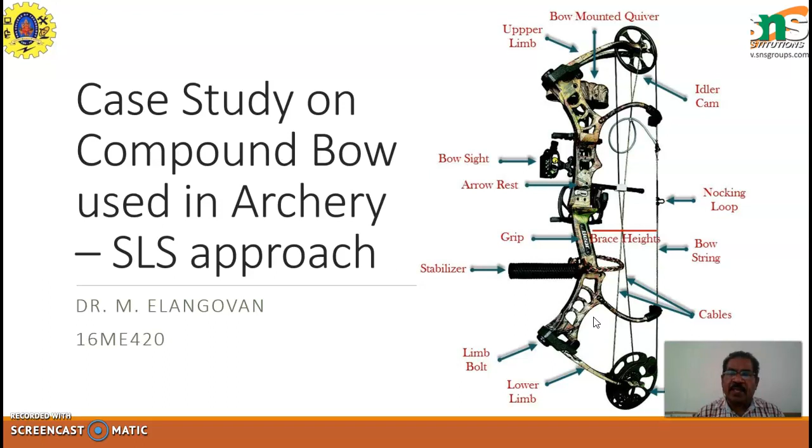Today we are going to look at yet another case study. This time we are going to look at the selective laser sintering approach. The product that we are going to look at is a case study on compound bows, which are used in archery. In archery, the schematic diagram has been put here, the actual diagram. And here you see a cam, this part and this part. Now, as light as possible and as strong as possible is the requirement to make a bow. Now let us see further.

This is an adaptation of a paper, Designing for Metal Additive Manufacturing: A Case Study in the Professional Sports Equipment Field. It was presented in the year 2017. It's an Italian paper, and the authors have very clearly said in the paper that they discuss the possibilities available as well as the challenges faced during the design for metal additive manufacturing, especially during selective laser sintering.

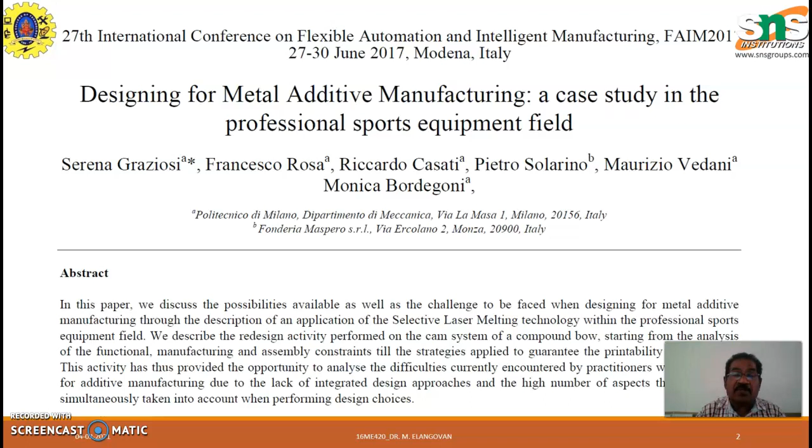What they are trying to concentrate on here is how design for additive manufacturing plays a role, how they were able to improve the quality of the design using additive manufacturing, and what were the challenges that have been faced. Here, as I said in the introduction, let us introduce ourselves to the case study.

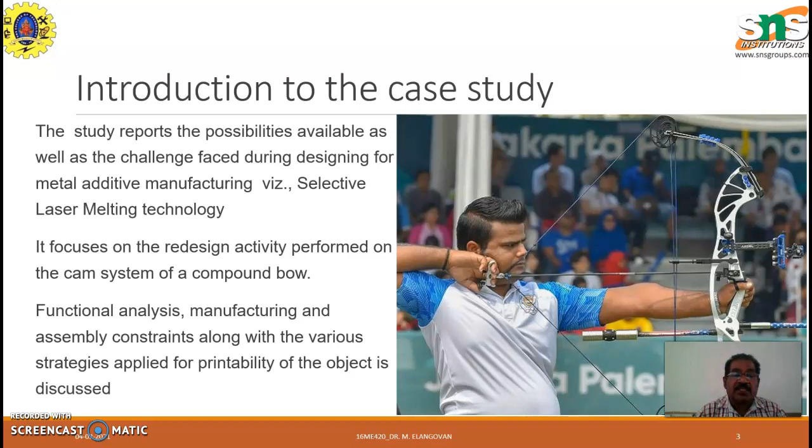The case study reports the possibilities available as well as the challenges faced during the designing for metal additive manufacturing. It focuses on the redesign activity performed on the cam system of a compound bow. There is a cam system which tries to tighten or loosen the cable based on its rotation. So there must be a groove where the cable moves, and it must be hinged about a fulcrum point. The functional analysis, manufacturing and assembly constraints, along with the various strategies applied for printing of the object, are discussed here.

Now, what is selective laser sintering? It is one of the additive manufacturing technologies available to us, and here we use a powder. It uses a laser as a power source to sinter. Sintering is melting and joining the powder together, typically nylon or polyamide, aiming the laser automatically at points in space defined by a 3D model, binding the material together to create a solid structure.

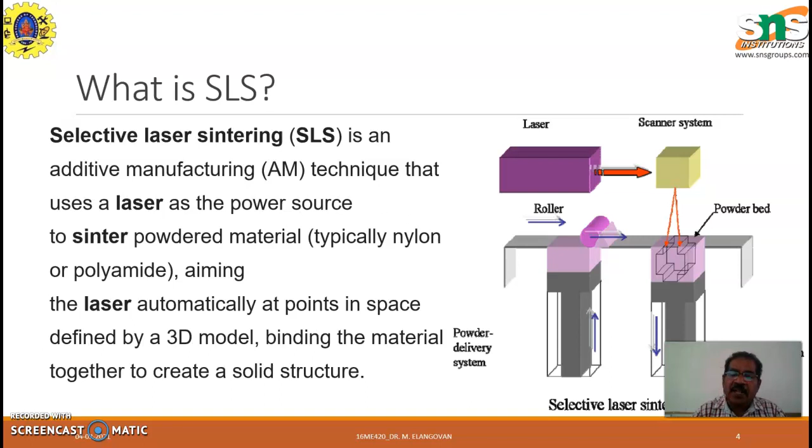Now here we are talking about nylon and polyamide, but actually there is metal sintering also available, and in this particular case study we are using metal sintering. The process is the same. So let us look at the process. You have the metal powder, and it gets smeared onto the platform. Once it gets smeared, the laser comes, and the sliced 2D geometry of the part gets laser treated and cured. That will be the sintered part.

This table then moves down. Then the excess powder comes to this place, or sometimes it may be two-way also, one way moving on this side and the other way. So the roller constantly spreads the powder onto the build platform, the laser cures it, and as the table goes down, the part gets built up here. Finally it can be taken out. Here no support is required because it is all treated layer by layer, and we can always do some kind of post processing on the final part.

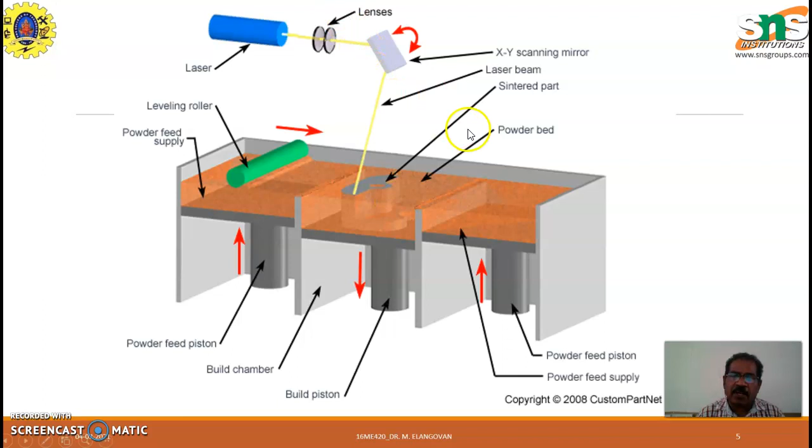Now, the schematic cam system assembled to a compound bow is shown here. This is how the cable moves around, in a crisscross way. There you see the complication of this part. This entire thing has to be handled by a male or female sports person, so it must be lightweight, but it must be strong to launch the arrow. So this is the schematic diagram and the entire diagram shown here. Additive manufacturing plays a role in manufacturing this particular product.

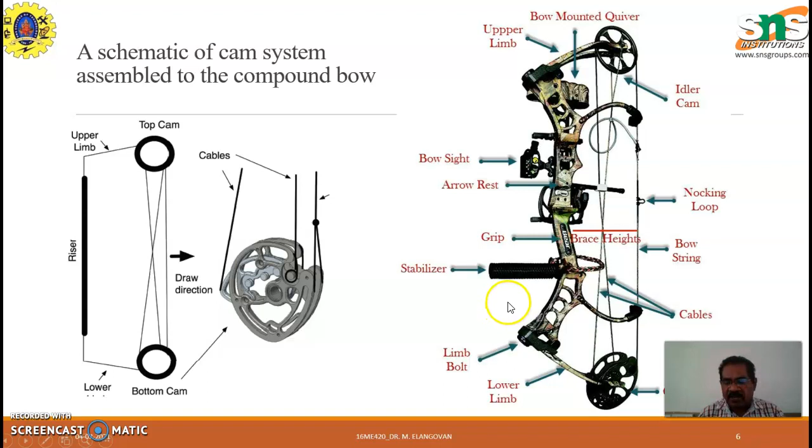Now, the main features and elements of the system, with its exploded view highlighting the housing and the anchoring elements for strings and cables, are shown here. What you have to look at is the volume of the entire part, its size, how much space it occupies, the encumbrance space, its moving space, etc. When it rotates, the space that it occupies also has to be studied.

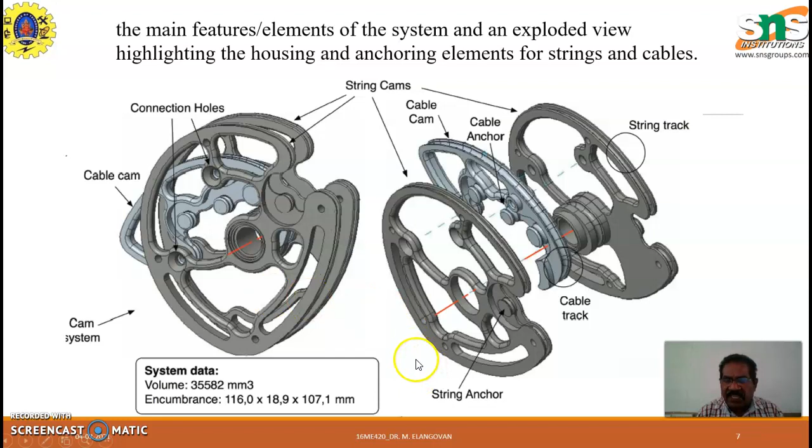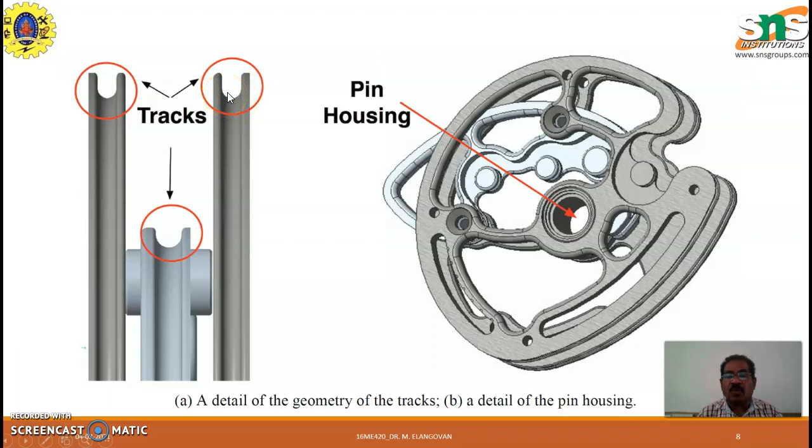Now, you see the complications or the precision that is required for the tracks and the semicircular geometry that is there. Okay. Now, this is where the cable is going to go around the pulleys there. Okay. Now, they have tried a different kind of orientation for this.

Whether it could be mass manufactured, where they are going to make 6 modules of this, what will be the height of the part, how much surface support is required, and what is the volume of the support that has to be done for the support operation. Optimization is being carried out on this, in the AS IS cam system.

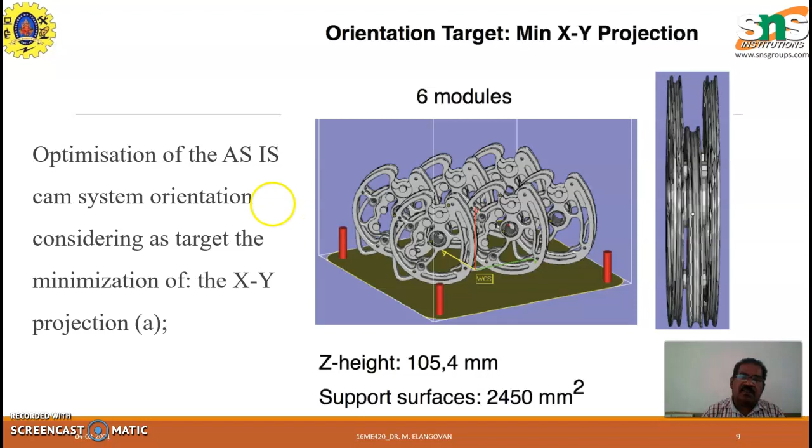Okay, currently this is how the part is, and then they try to optimize it, considering the target of minimization of the XY projection. In this slide they want to try and minimize the XY projection. Now, the next one is they want to minimize the support surface. Here they have taken 4 modules, and they try to make a 45 degree orientation of the part. Once they do it with a 45 degree orientation, the Z height and the support surfaces are also being calculated here.

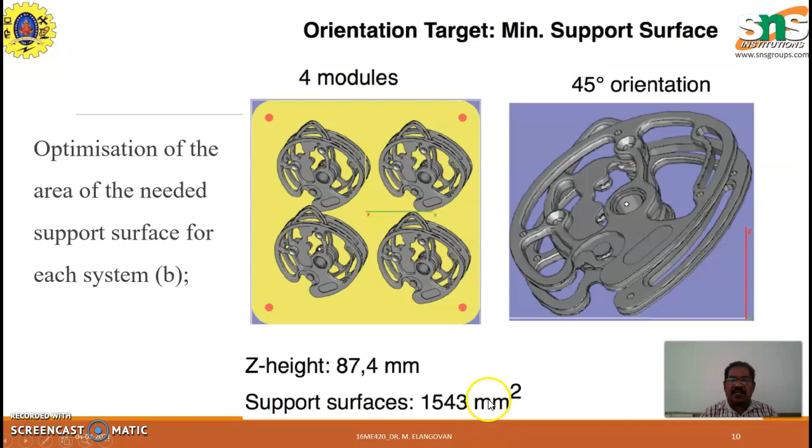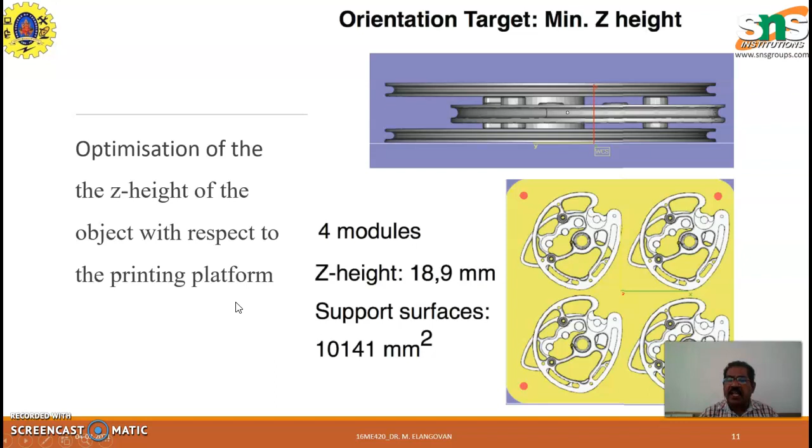Again, next iteration, they try to minimize the Z height. The optimization of the Z height of the object with respect to the printing platform is also being done, and they try to arrive at the proper Z height. So, in all the 3 iterations, they check the support surface, the volume of support that it has to take, the total Z height, and the XY printing area also.

Now, with all these things, they have tried to redesign the part. In trying to redesign, they made some places open for easy insertion and removal of the cable. That is also an important thing, that the cable has to be inserted and then removed. So, for that they remodified the part. The geometry itself got changed. The volume has come down, and the pinhole they have left for machining purpose. They are making it as a solid, and then leaving it for machining.

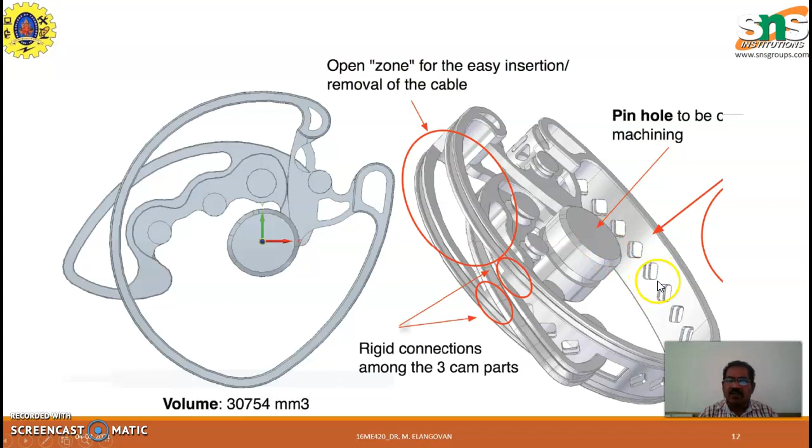Here we see a lot of holes are also being printed, for lightweighting. Then the horizontal section view of the cam is shown here. They have cut here, and there is a 45 degree rule. The holes are made in a rotated manner, at 45 degrees to the angle of printing. So, when it is 45 degrees, the support need not be there. It can be self supported. So, the support structures can be brought down.

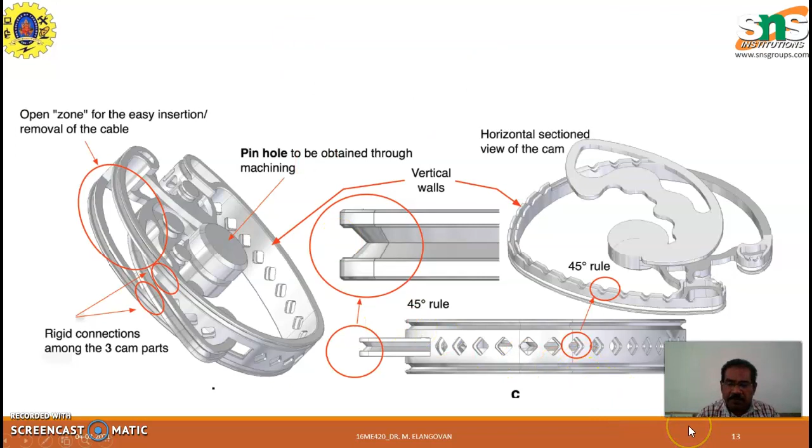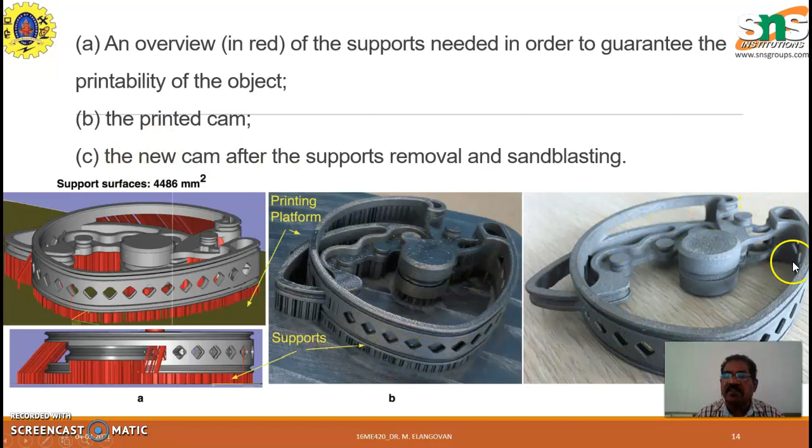So, open zone for easy insertion and removal of the cable. Rigid connections among the 3 cam parts have been done. Pinhole to be obtained through machining. And the horizontal cam view is also there. Now, an overview in red shows all the supports that are there, and the printed cam is shown here. And after removing the supports and sandblasting, they have done this part.

In conclusion, they have claimed good results, that 20% volume reduction has taken place. A new design is there. Design for additive manufacturing itself is a different area which helps us to look at the design in a different manner based on additive manufacturing. But they have also highlighted some of the drawbacks. They say that,

the discussion has further highlighted what has already been underlined in the literature, that is the lack of integrated design tools in order to reduce the design iterations given by the necessity to frequently check the printability of the solution when complex changes in the geometry are there. So this is a new era of additive manufacturing. I have to keep on checking whether it can be printed or not. For that, simulation is required. Checking printability when I make changes during my design is lacking.

The second, there is also a lack of tools and consolidated procedures to support the decisions about the selection of optimal trade-off among the various functional, technical and manufacturing requirements to be taken into account in design for additive manufacturing. They have definitely pointed out the lack of some facilities or tools that are required for additive manufacturing.